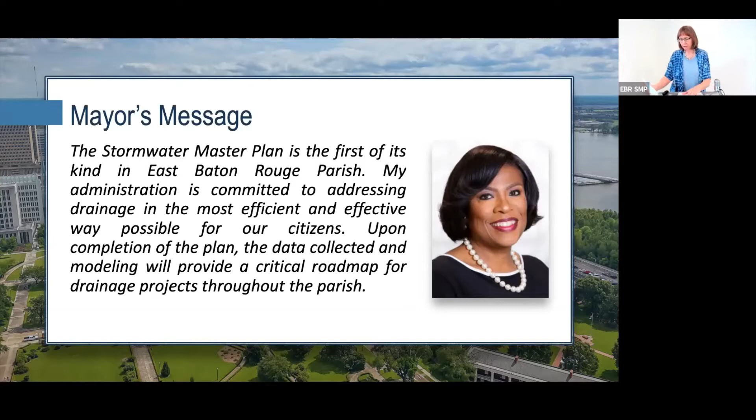What you're seeing here is a message from the mayor, showing her commitment to this project. When she came into office, she said that this is one of her top priorities, to address flooding and drainage within the parish. It is really through her leadership and initiative that we are moving forward on trying to come up with flood risk reduction throughout the parish.

So what is the EBR Stormwater Master Plan? It was actually implemented after the 2016 event. It'll be the guiding document for the implementation of projects and policies for the overall flood risk reduction throughout the parish. The plan will implement goals and objectives in alignment with other various parish programs, including Future BR, the Parish Hazard Mitigation Plan, and we're coordinating with the Move BR program.

In addition, the goals and objectives of this plan are directly in alignment with the Louisiana Watershed Initiative. The plan is intended to be data-driven and science-based and will incorporate climate change. As you know, people have been seeing more rainfall, higher intensities. The average rainfall for Louisiana for Baton Rouge is about 62 inches a year, and we've already exceeded 45 inches to date.

The Stormwater Master Plan is being developed in 3 phases. Phase 1 is the implementation framework, and that has been completed. That was prepared based on preliminary data collected and a risk analysis conducted to map out the tasks and costs of those items needed to develop the Stormwater Master Plan.

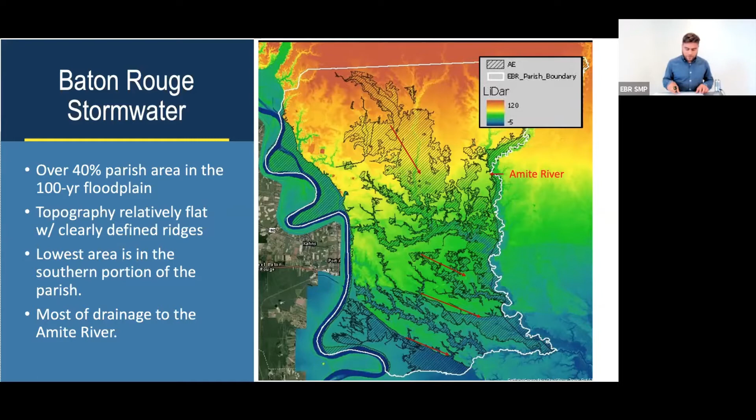And they flow into the Amite River, which makes up the eastern border of the parish, and then keeps flowing beyond the border into the lower and lower elevation areas, like you can see in the bottom right-hand corner down there. So yeah, all of the water flows from high point to low point until it reaches a common outlet.

And for the local level, we evaluate many sub-watersheds within each of these main regions represented by the color areas. And for the regional level, we evaluate the entire parish, just like in the map previously.

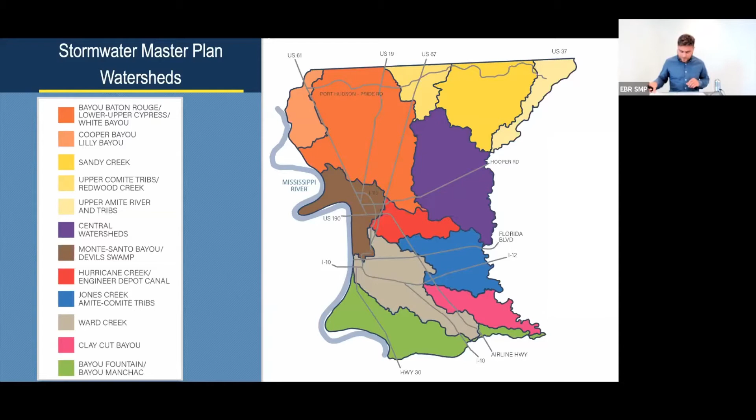So, we've mentioned the term watershed several times already, but what exactly is a watershed? So a watershed is simply an area of land that water flows through before draining to a same or common outlet like a river, stream, or creek. And the topography of land determines the divides or boundaries of a watershed.

So there's a hierarchy of watersheds. The biggest can be as large as the Mississippi River watershed that drains to the Gulf of Mexico. And they can be small, as little as a pipe that collects stormwater from certain areas and then drains that into a common ditch.

So in the parish, water flows in smaller watersheds from high points to low points, which are like streams and creeks, like Ward Creek and Clay Cut Bayou. And on the large scale, all those sub-watersheds flow within the bigger watershed to one common outlet, which is the Amite River, like I said earlier, just like in that colorful map that we saw.

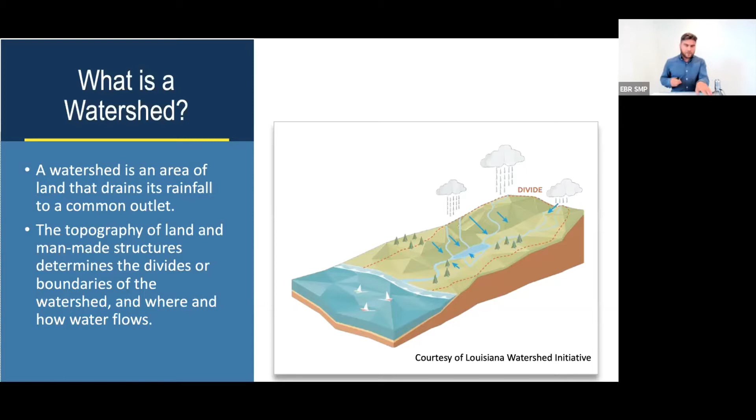So this is the Stormwater Master Plan, but what exactly is stormwater? It's also a very simple term. Stormwater is water that comes from rain.

And when it enters a watershed, stormwater can do one of 3 things. It can soak into the ground and become groundwater, it can evaporate and go into the air and atmosphere, or it can run off surfaces into the parish drainage system, which is made up of pipes and networks of ditches. And so the runoff in the parish drainage system will ultimately make its way to the streams, creeks, and rivers.

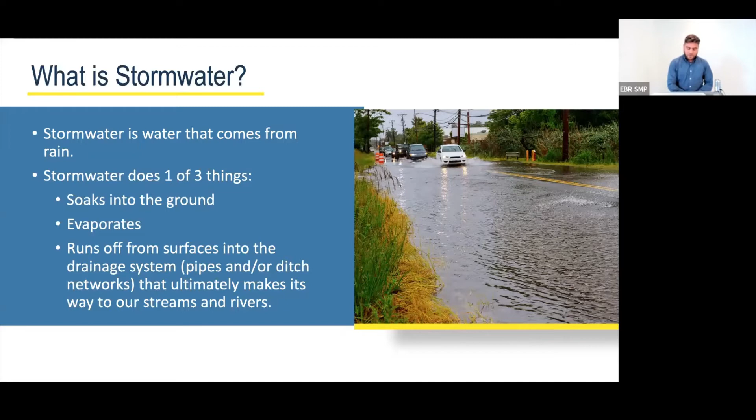And so speaking of stormwater and stormwater runoff, it's important to note that hard and impervious surfaces can increase the amount of stormwater that is within a watershed. And that makes it difficult for stormwater to soak into the ground. Examples of these kinds of surfaces are seen right here on the slide: roads, parking lots, sidewalks, driveways, and even roofs. And because stormwater can't flow through these surfaces, the water has no choice but to become runoff, and then the runoff has no choice but to go into the drainage system.

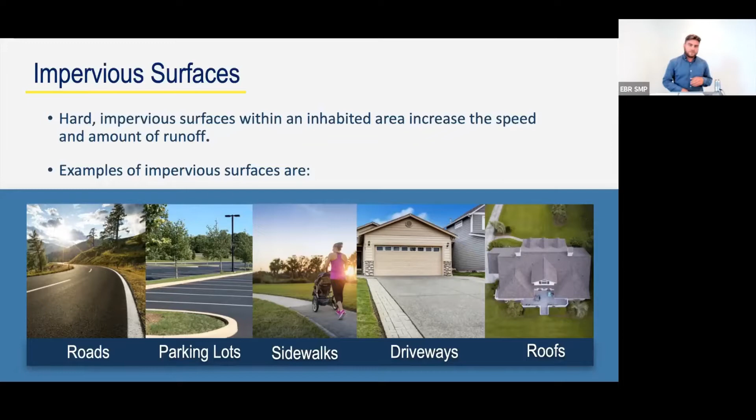So what do I mean by the drainage system? Well, this slide shows the kind of surface and subsurface drainage system that's used in the parish. Subsurface drainage uses a network of underground pipes to guide water away from problem areas and into ditches and canals. Surface drainage involves moving excess stormwater runoff off the surface of the land by guiding it into shallow ditches.

So remember the fact that impervious surfaces can increase amounts and speed of stormwater runoff, and that in turn can overwhelm the capacity of these subsurface and surface drainage systems before they have a chance to drain into the watershed outlet.

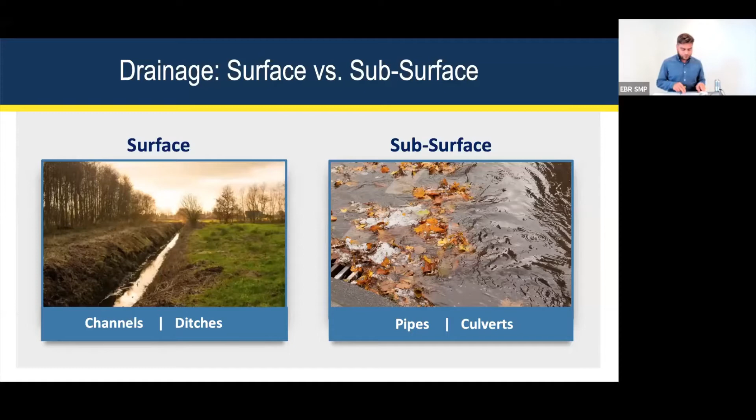And so that can lead to flooding. There are many types of flooding and causes of flooding. Intense rainfall and swollen rivers and streams can all lead to flooding.

Other causes of flooding can range from a lack of maintenance of infrastructure, to stormwater exceeding the design capacity of drainage systems, which just means more water enters the system at one time than it was originally designed to take. And then there's backwater flooding from downstream systems.

And so these factors, along with the historic rainfall and the subsequent stormwater runoff, really heavily contributed to the August 2016 and May 2021 floods in Baton Rouge.

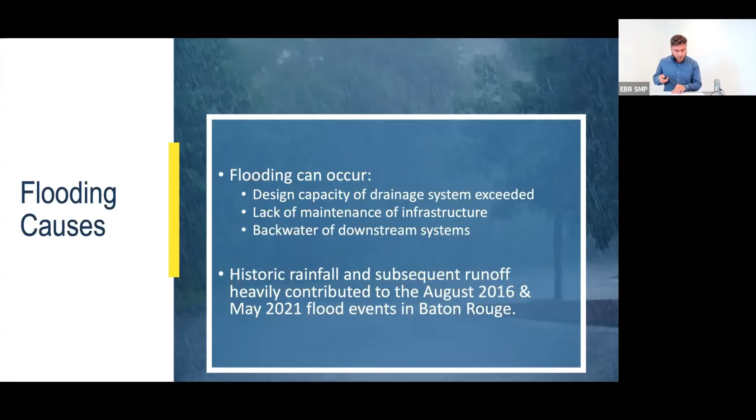So that brings us to our topic tonight, and I'm going to hand it over to Melissa to talk about the Stormwater Master Plan.

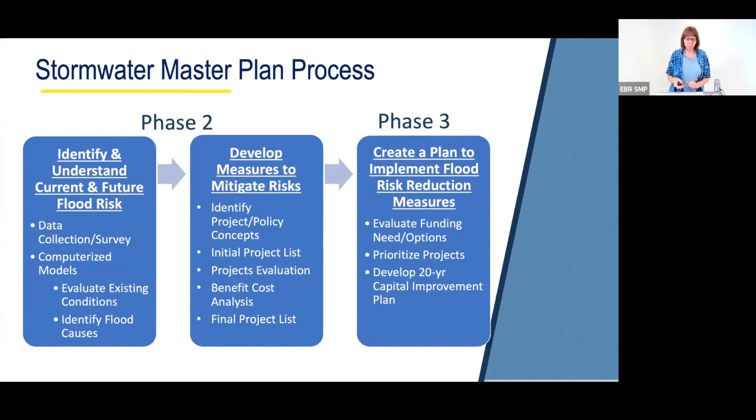So understanding the flood risk, how do we do that? Again, we did a massive data collection effort that was done in the first year of the program. We started this in January 2020.

And what that included was finding out, surveying the existing subsurface system, which includes your manholes, your inlets, your catch basins, your pipes, culverts, and your outfalls. We utilize the GIS online real-time program to do this so that we could actually see the data as it's collected, as well as the parish could see the data as it was collected.

And we collected information on the type of features for each of the structures and also the condition - a qualitative assessment of the condition, as well as the amount of sediment in each of those. As I said, being able to see this in real time, we could find where there were problems and be able to coordinate with the parish to address those immediately if needed.

There was one day where the crew called and said they found a sanitary sewer system draining into the storm sewer, which is a no-no. So we were able to coordinate with the parish to get that taken care of immediately.

So at the end of that data collection, we were able to provide the parish a GIS database with that information, which also provides an electronic map of the system to the parish. So now they have this database that they can utilize to address their current maintenance issues and also for future operation and maintenance.

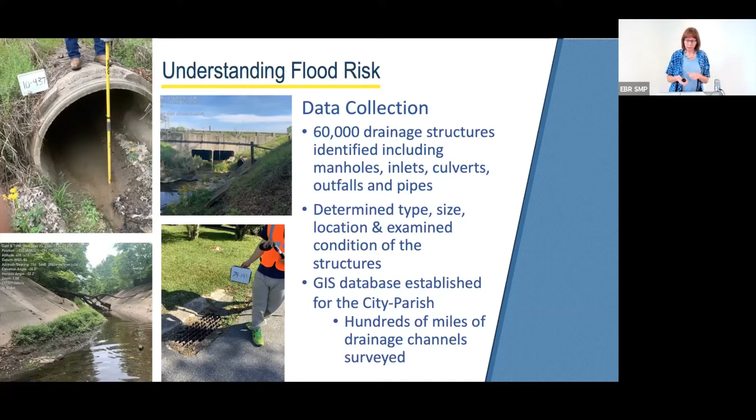We also did surveying of the surface channel system. We surveyed over hundreds of miles of drainage channels, including cross sections, bridges, culverts, and other types of features that might be in the channel, such as utility crossings. And that data was collected for areas beyond where we did not already have existing information. We were able to use data that had been collected previously by others.

So then we take that information and put it into these computerized models. Those models identify the extent and depth of water for various existing and potential future rain events. From that, we can also develop flood inundation maps and determine the damages as a result of these different rainfall events. Then utilizing that, we can come up with projects to mitigate flood risk and use those models to evaluate the projects.

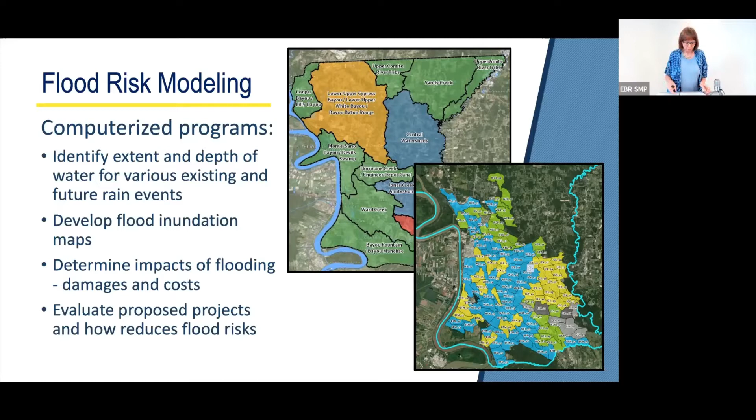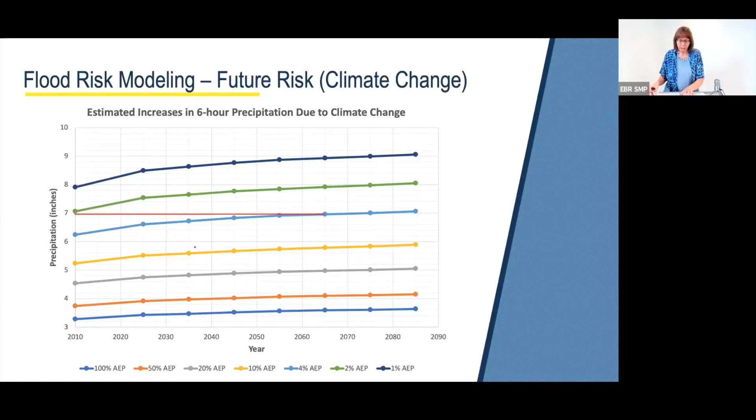And then someone asked—there was a council meeting last night for EBR—and someone asked if the criteria we're utilizing should be changed as we evaluate our systems and for design. And I said that is something we will want to investigate as we start looking at the policies.

So how do we go ahead and mitigate flood risk? There are various techniques. Again, the first thing we really want to focus on is maintenance of the existing system, to address those issues, and then not only maintenance of the existing system now, but we want to plan for that continual maintenance going forward. Right now, the parish's budget for transportation and drainage maintenance is about $8 million a year. This is definitely not enough money to address maintenance needs. So that's the first thing we want to do.

Then we want to look at other flood risk reduction infrastructure methods. That could be channel improvements, detention ponds, pumping, levees, bridge replacements, culvert replacements, etc.

Are we doing the best we can as we develop in the floodplain? We'll definitely be looking at that. The parish has actually been changing their codes regarding development since the 2016 flood. There have been a number of revisions over the years. We also provided some recommendations recently that were just adopted last week. But we don't want to stop where we are. We want to continue looking at those policies moving forward.

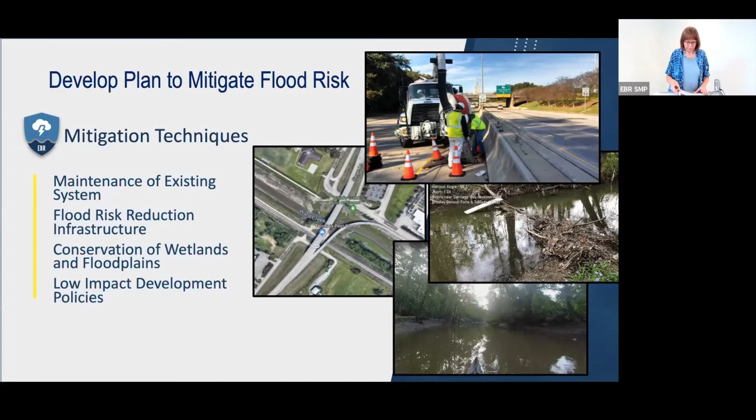We want to look at potential buffer zones along our riparian corridors, in addition to conservation districts. And we want to take a harder look at our drainage requirements.

I want to stress that we're not waiting till the end of this plan to make progress. The parish is already moving forward on a number of initiatives. We helped the parish develop projects for the hazard mitigation program, grant program. Six of those projects have been approved by FEMA, and they're on their way to design and construction. Two of them, design consultants, the designs are in process. Three of them, design consultants are going to be selected shortly, if not already. One of those projects was recently approved by FEMA, and we're waiting for FEMA to approve one other project. Those add up to about 69.7 million.

There was about 14.3 million in Watershed initiative projects. There were 2 floodplain preservation projects recently approved. We have other projects that are out there that will be submitted in round 2 of the Watershed initiative projects. And then last, we have 20 million from the CARES Act that the parish is applying to maintenance. That will be for channel clearing, roadside ditch cleaning and cave-ins, and cleaning out of the subsurface system where there are problems. That money was approved last night at council.

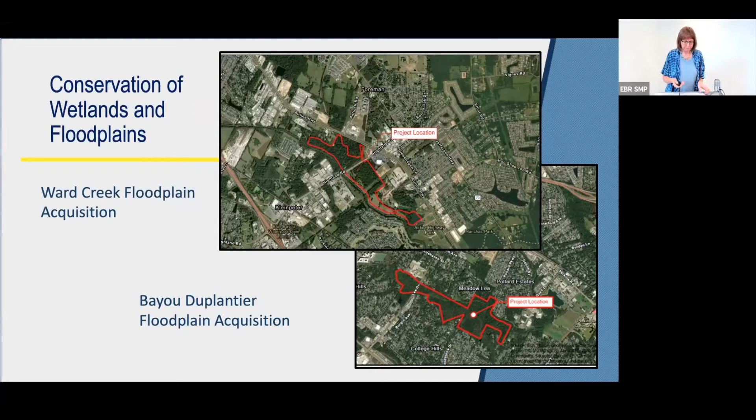I want to focus on understanding the flood risk modeling assessment. That is the task we are working on right now, getting those models built out, calibrated, and the flood risk assessment completed, so that we can move on to the next item, which is developing the projects and policies to mitigate the flood risk. I know everyone's very concerned about codes and ordinances, and we're hoping to have additional recommendations by May of 2022.

So that just gives the overall schedule. Now, how can you help? Well, I'm going to tell you. There are actually a number of things you can do.

First off, one of our concerns, and people complain and have a lot of 311 calls, is because of the debris and stuff in the actual storm system structures in the street. So we recommend don't throw your litter in the street, keep your leaves and grass cuttings, etc., out of the street. Those actually contribute to the clogging up of the system. And the other thing, my pet peeve, is not picking up your beads after the parades. I love the parades too, but I wish people would pick up the beads.

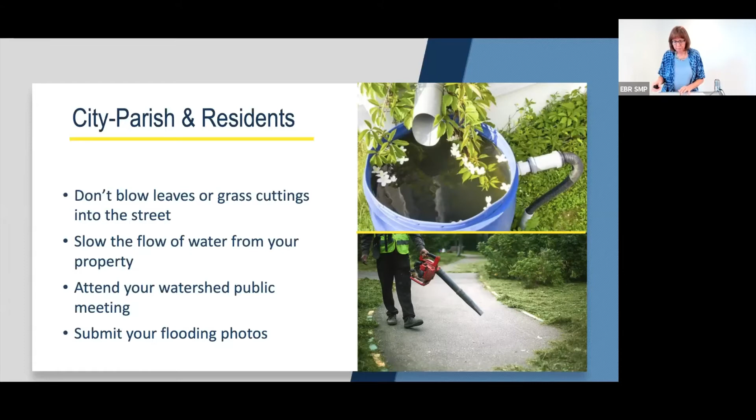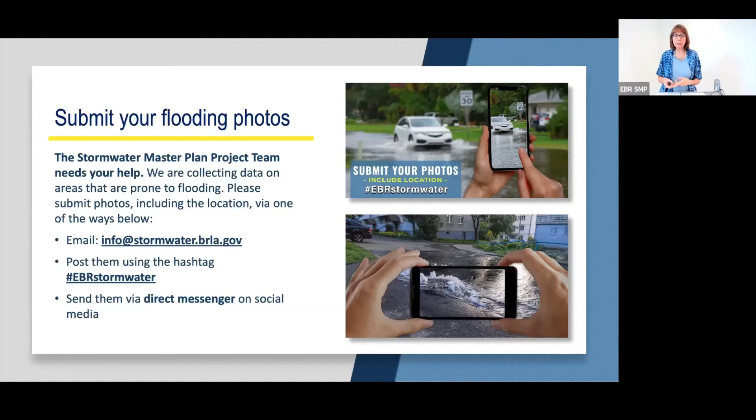So how can you submit those photos? There's a number of ways. You can email them at info@stormwater.brla.gov, post them using the hashtag BR Stormwater or EBR Stormwater, or send a direct message on social media - Facebook, Twitter, or Instagram.

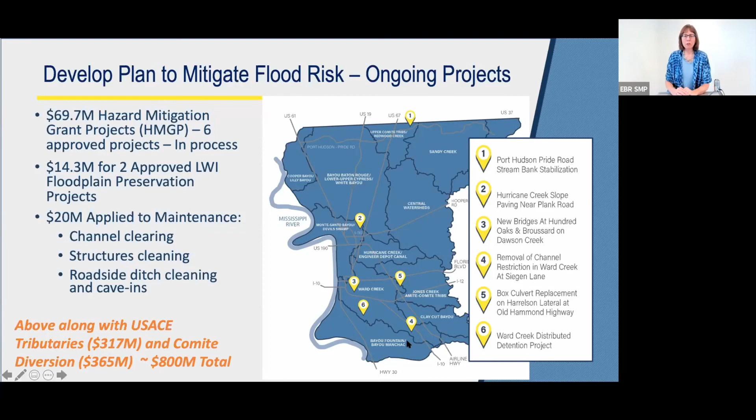We have one of the mitigation projects at Ward Creek, right at Siegen Lane. It's a constriction there. It's not a complicated project, but it's very frustrating because we have to follow the overall process. And that one has been awarded to a design consultant and is proceeding.

Are the downstream parishes going to participate in this plan, or any alternate plan, to allow for an improvement in water flow? So we are engaging the adjacent parishes as well as the other communities.

We have what I call our partners meeting, which includes the adjacent parishes, includes the Watershed Initiative, includes the Amite River Basin Development Commission, includes Baker, Central, Zachary, LSU, all these other entities that have a stake in what happens to the water. So yes, we are including them, because we want to make sure they know what we're doing and vice versa. We need to understand what others are doing as well. And, oh, I forgot FEMA and the Corps.

Have you considered using SWMM rather than HEC-RAS for the models? So the watershed models we showed on the map with the 11 watersheds, we're using HEC-RAS. For the smaller subsurface watersheds, for the subsurface system, we are using SWMM. So we're using both of those models.